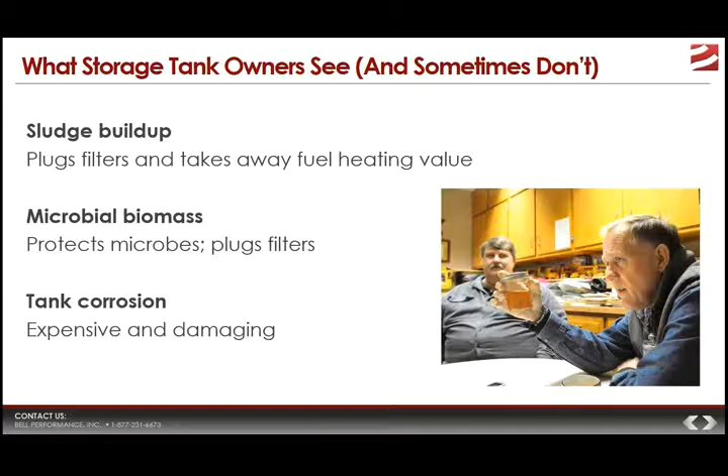Tank Treatment SDF. SDF stands for Sludge Dispersant Formula, and it was formulated as a response to some microbial tank problems that one of our municipal county customers was experiencing. We introduced it in early 2015, so it's one of the newest formulations for Bell Performance at this period in time, depending on when you're accessing this training.

We introduced it because we had a customer that had a tank with a fairly conventional microbe problem. The tank was treated with Bellicide, Bell Performance's biocide, and it killed everything it was supposed to. The tank checked out, microbe count checked out clean, and seemed like everything was okay. Then about two weeks later they came back and said, well, we've got microbes back in our tank.

As it turns out, their experience is not uncommon. Basically what was found was that these microbes produce biomass formations, which form and accumulate in various areas of the fuel distribution system. So there were microbes shielded from the biocide. The tank system checked out, the fuel checked out clean and microbe-free. Then they probably had a fuel drop, which disturbed the biomass, allowing those microbes to reintroduce themselves back into the tank, essentially re-inoculating it.

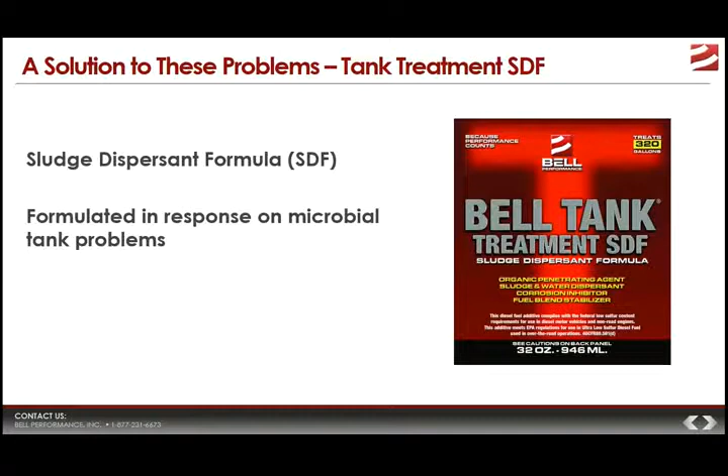So what does Tank Treatment SDF do? Well, first, it absorbs and disperses the petroleum fuel sludge. It reduces sludge deposition in all areas of the fuel system.

Once it's in the fuel and comes in contact with fuel sludge, it will absorb and disperse heavy sludge deposits into the fuel. Over time, as you leave it in that tank, the sludge presence in the tank and fuel distribution system is reduced everywhere that treated fuel contacts. So storage tanks, fuel delivery lines, fuel injectors and injection guns will all be cleaned out over time, and the dispersed, absorbed sludge then goes out and is combusted with the rest of the fuel.

The second thing that SDF does is provide corrosion protection. It was formulated with an amide chemistry, which lays down a layer, what we call a barrier or boundary layer of protection on all the tank surfaces that the treated fuel touches. This protective barrier essentially shields and protects that metal surface from corrosive damage by other things that may come along.

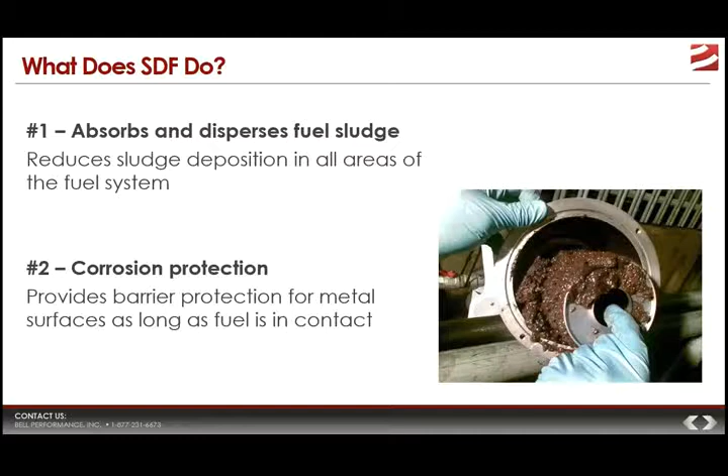You do see some corrosion above the fuel line, but that corrosion, typically microbially related, like vapor corrosion, can be remediated by using the coordinating biocide along with SDF. So fuel sludge absorption and corrosion protection are two things that SDF does.

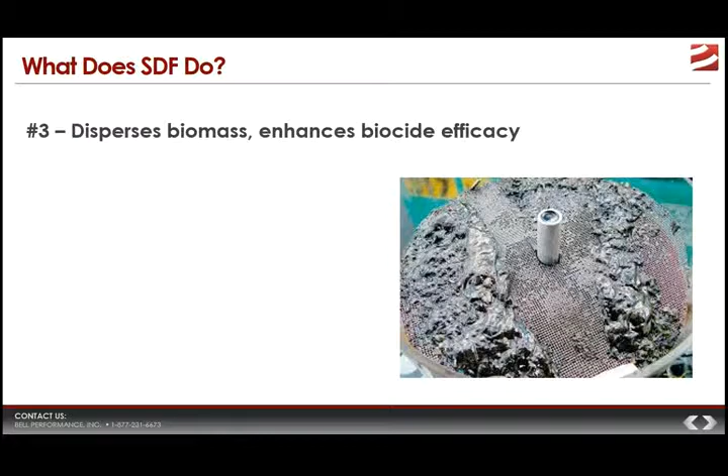The third thing that SDF does is, as we mentioned before, disperse biomass, and therefore enhance biocide efficacy.

When it disperses the biomass, the previously protected microbes aren't protected anymore, and the subsequent biocide will kill more of them, helping prevent fuel system reinoculation.

This isn't an inconsequential thing. If you're a fuel tank owner with a microbial problem, and you finally come around to treating it with biocide, you have certain expectations. If you do everything you're supposed to and the problem comes back in two weeks, how much of a headache is that? What are you going to think about the biocide you used? You're probably going to think you were sold a bill of goods.

That's why it's a good thing from Bell Performance's standpoint to have something like this, because our biocide, Bellicide, has chemistry that's one of the best on the marketplace, and we don't want important customers calling back saying this stuff was worthless, my problem's back in a couple weeks, what are you guys trying to sell me? So SDF has value both for the customer and for us, because there's plenty of worthless stuff in the fuel additive market, and we've worked hard over the years to differentiate ourselves from the fly-by-night people. This helps us continue to do that.

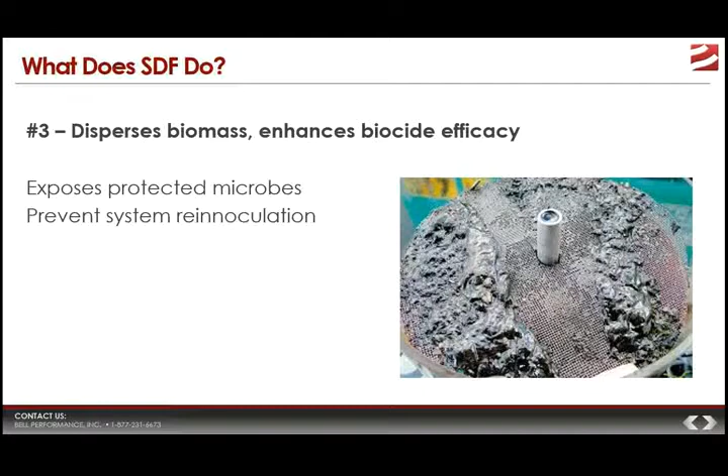As with many things, SDF works best when applied properly. If you've seen our trainings on the DFS plus water controller, or the biocide training and product descriptions, the same principles apply here: it only works if it comes in contact with what it's supposed to be treating. It has to come in contact with sludge and biomass to do something about them. It's not going to work by telekinesis or osmosis—it has to physically touch them.

Therefore, it matters how you apply it. Application method matters. The best application method is the one that puts it into the closest contact with the sludge and biomass for the longest period of time.

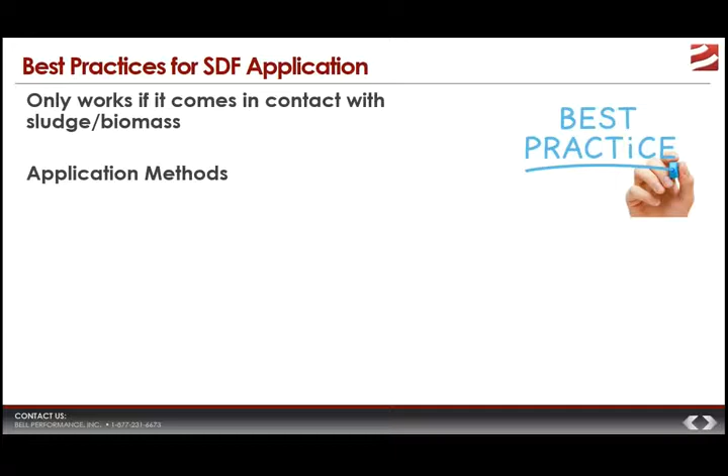Typically there are four main ways people apply this kind of thing—some good, some not so good. The worst one is probably the easiest, unfortunately. That's addition on top of the fuel, and then just leaving it there. They pour it into the tank and leave it, relying on diffusion to spread it through the fuel until it eventually reaches the sludge. Unfortunately, that takes a long time. You don't get the best contact, you don't get the maximum contact, and it's probably not going to work anywhere near as well as expected. So addition to fuel with diffusion is really unsatisfactory—not a good way to do it.

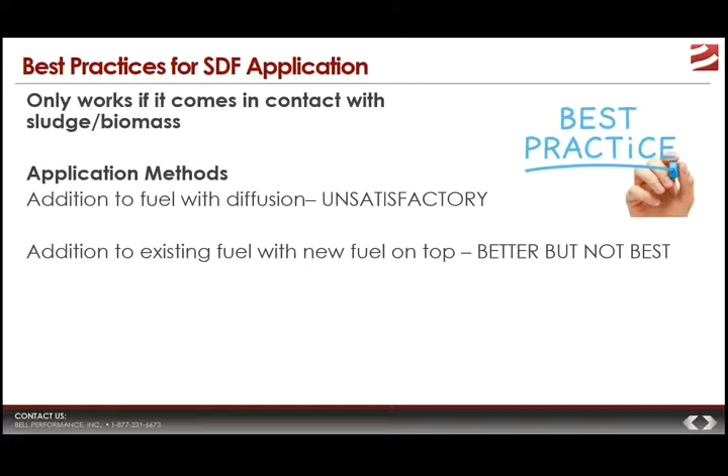Addition to existing fuel and then adding fuel on top is certainly a lot better than relying on diffusion. This is the old splash blending technique, where someone adds it to a tank that's half full, then has a scheduled fuel drop to fill it back up to capacity. The new fuel goes on top of the treated fuel and churns and mixes together. That's better because you get more contact. It's not quite as systematic as some other methods, but if you don't have the ability to do one or the other, this would be the default method.

Addition with fuel circulation is probably the best recommended way to do it—not only because it puts it in contact the most, but because more people have the ability to do this. You add it to the fuel, then use an existing circulation system to circulate the fuel for a given amount of time.

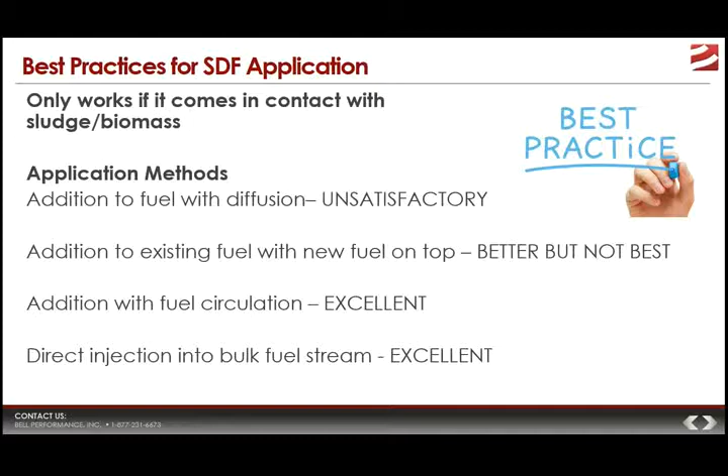The fourth method is direct injection. Not everybody has the ability to do this, but for people who move a lot of fuel, they often have equipment to inject it directly into a bulk fuel stream. This gets excellent mixing and is an excellent way to apply the product. So addition with fuel circulation and direct injection are probably the two best practice ways to do it, because they maximize the residence contact that the treated fuel has with the sludge and biomass, enabling it to work most effectively.

One good thing about SDF is that it is highly concentrated. It was formulated to work at treat rates between 1 to 10,000 and 1 to 20,000. It was formulated this way because people who move a lot of fuel tend to have tighter margins, so while they may need to solve the kind of problems we were talking about earlier, they have to be able to do it in a cost-effective manner. SDF really helps them do that.

So the default treat rates are between 1 to 10,000 and 1 to 20,000. But sometimes you can adjust the effective treat rate dependent upon the amount of sludge that's in the tank and the volume of fuel that's in the tank.

This speaks to the fact that SDF is a kind of fuel treatment that's a little different than some others. If you divide fuel additives into categories, on one hand you've got fuel treatments that change the specifications of the fuel, like a cetane improver or a lubricity improver. On the other hand, you've got treatments that solve problems by addressing things outside of the fuel, like water absorbers and sludge dispersants like this.

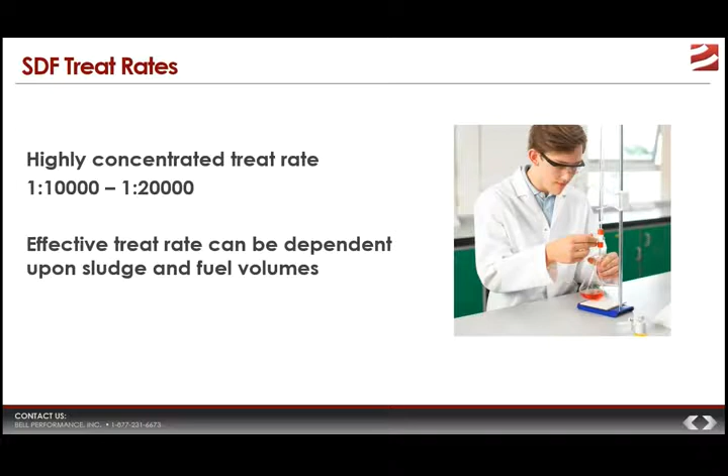However, when you're treating water or dispersing sludge, your effective treat rate really depends on how much water or sludge you've got in that tank. And it's not always easy to know the answer, because many times you can recognize a sludge problem by things like filter plugging, but it's really difficult to know exactly how much sludge you've got in a tank, because very rarely can anyone actually go into a tank to measure it.

Another thing that influences the effective treat rate is the volume of fuel or liquid that's in the tank. This matters because it affects how the treatment contacts the sludge or the biomass. It doesn't mean it's going to be less effective, but it may change the amount of time necessary for it to work.

If you've seen our training on DFS Plus water dispersant, it's the same principle. If you have two tanks, say one is a small 500-gallon tank and the other is a 10,000-gallon tank, and they both have the same volume of sludge in them—let's say the equivalent of 5 gallons of sludge, or half an inch, however you want to put it—same amount of sludge in both tanks, so theoretically you should need the same amount of SDF.

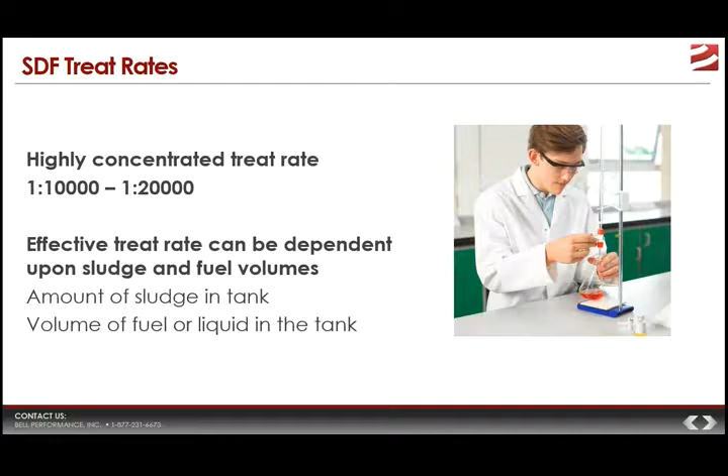However, if one's got 500 gallons of fuel, that SDF is going into 500 gallons of essentially solvent. The other is going into 10,000 gallons. So the same amount of SDF is going in, but what you're going to need to do is increase the circulation time, and allow for a longer time for that larger tank to work, simply because of the dynamics of the amount of fluid in that tank.

Now, common questions we've been asked—since this is a relatively new product for Bell—may have cropped up in your mind as we've been looking at this, or if you're a Bell staff member, these are ones people in the field are likely to ask. One question: if you treat sludgy fuel with SDF, how's it going to change the mileage? Is it going to improve? Decrease? What's going to be the effect?

The answer is that you would likely expect a small drop in mileage compared to fresh fuel, not compared to the sludgy fuel that's already in there. The nuance is that fresh fuel gets the maximum mileage because it's in good condition. That fresh fuel was left in the tank for a period of time, started to break apart, and part of its energy content left it in the form of sludge. So if you take that sludge and draw it back up into the fuel, and it goes out into the combustion chamber...

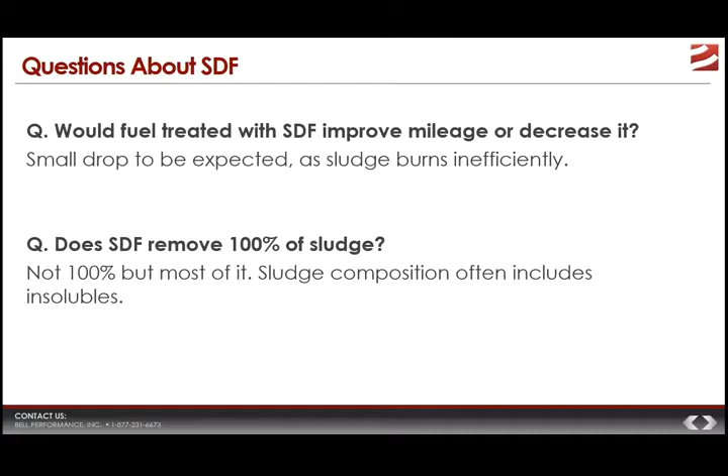Second question: does SDF remove 100% of sludge? Bell Performance does business internationally, and this was one question asked - if you treat sludgy fuel aiming to remove sludge with SDF, can you guarantee it removes 100% of sludge? That's a fair question, a little naive, which isn't a bad thing since not everybody is an expert in every area. Basically, if you look at the chemical or molecular composition of sludge, it often includes certain elements that simply aren't soluble in fuel, certain kinds of asphaltenes. So it's going to absorb and redisperse all of the soluble components of the sludge that are present. It's going to solvate and remove most of it, but the stuff that's not soluble, there's nothing that's going to be able to put that into the fuel.

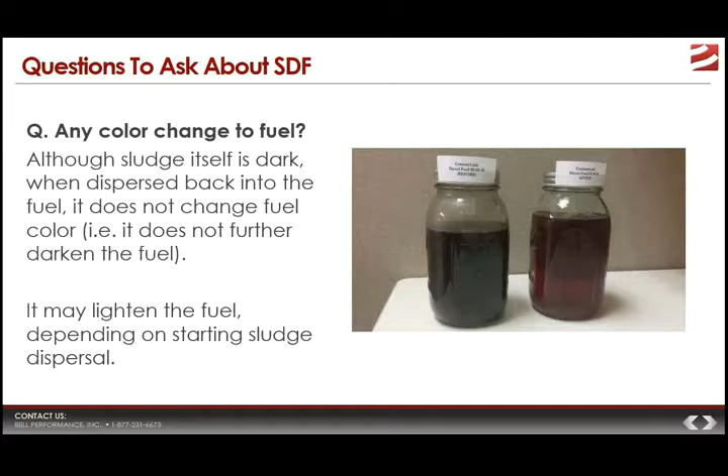Another question we get asked is how does it change the color of the fuel? Well, that's dependent upon a couple of things. Sludge - when fuel's unstable and sludge is dropping out, the fuel becomes darker, the color changes. So if the fuel is already dark, it's not going to make the fuel darker than it was before. It's possible it will change the color by making it lighter, though, and that's a good thing - if you've got black fuel to start with, and then it goes back to more the reddish dyed color it was before, that's a pretty good indication that the sludge treatment has done something worthwhile.

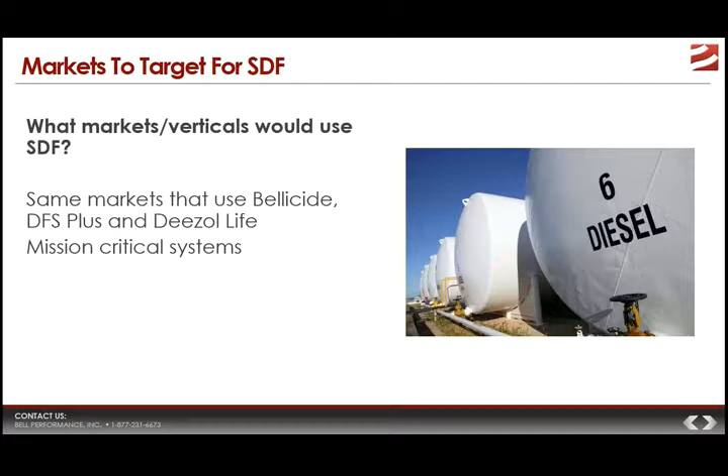What kind of people would find the most value with SDF? Internally, we'd ask what market verticals would be more likely to want to use tank treatment SDF. If you know anything about Bell Performance's product line, you know we have a fuel storage suite comprised of Bellicide, a biocide, DFS Plus water absorber, and Deezol Life fuel stabilizer. The same markets that use those products would also be applicable for tank treatment SDF - places like mission critical systems and installations that absolutely must have their stored fuel work at any point in time, because an emergency can strike at any moment. Same thing for emergency generation systems, and fleets that store fuel - they don't want their truck diesel engines adversely affected by sludgy fuel deposits, so they'll find great benefit.

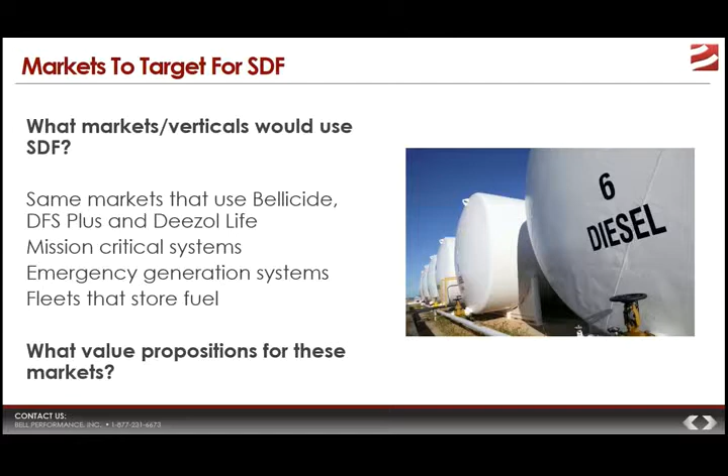And the market propositions for these folks - think about it. For mission critical and emergency systems, the value proposition is your system is going to do what you need it to at the most critical times. For fleets, you're going to have cleaner engines, better performance, and your mileage will probably improve. And for anyone with stored fuel that has a microbial issue, there's a huge value proposition, because it's going to better help them get rid of any microbial problem they have, and that's a huge deal for anyone who stores fuel.

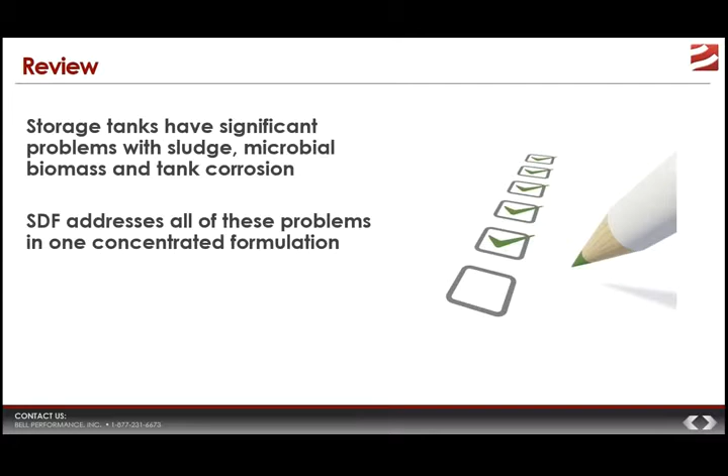So in review, all storage tanks have the potential for pretty significant problems with sludge, microbial biomass, and subsequent tank corrosion issues. Bell formulated tank treatment SDF to address all of these problems in one concentrated formulation that's economical to use for all users. It's an excellent product that works well, but it has best practice applications that are highly recommended for users to follow.